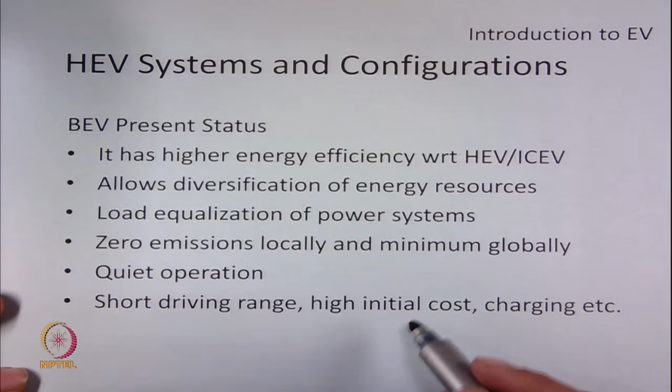The battery cost is high, and if you use a large energy content using a lot of batteries, then it is also costly. Secondly, we require a battery replacement after a cycle life of maybe 5 years, which again adds to the cost of electric vehicles.

Charging, as we have seen, is one of the very important things for a BEV. So the battery needs charging, and that also causes charging time to be available to the customer. Secondly, there is the requirement of charging infrastructure, which is not there at present on a large scale as compared to the filling stations for IC engine based vehicles. So all these limitations are hindering the growth of BEV as a mass scale vehicle.

So what is the solution? Hybridization of resources is one of the key elements which is generally looked into. We have already seen that there is a possibility of using one or more energy resources within a BEV.

We have explored that if you use a fuel cell, which has high specific energy, and an ultracapacitor, which has high specific power, or other things together, it is possible to increase the driving range and even get a performance similar to an IC engine based vehicle. But the limitations we have seen in a battery driven vehicle still remain.

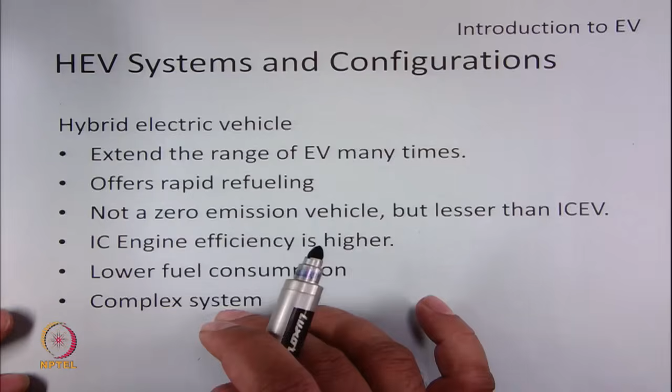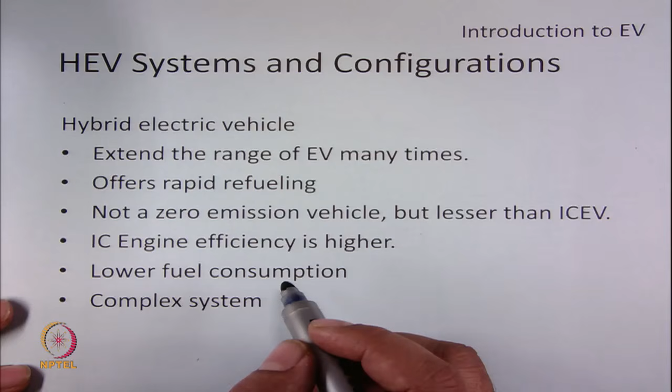So what can a hybrid electric vehicle do? A hybrid electric vehicle is one that utilizes both the IC engine and electric motor within the same vehicle. Since the IC engine based propulsion is attached to the hybrid electric vehicle, range anxiety will not exist anymore. Secondly, since we have filling stations which can readily give petrol or diesel for the vehicle, the fueling infrastructure is also taken care of, and we need limited resources for battery charging.

So it is not a zero emission vehicle, but the emissions are lesser than a full IC engine based vehicle. In addition, we can see that now the IC engine efficiency may be better and it may be taking less fuel for driving the total vehicle.

So the only price we have to pay is now the system will be complex, and it has to be handled properly such that all these benefits can be obtained.

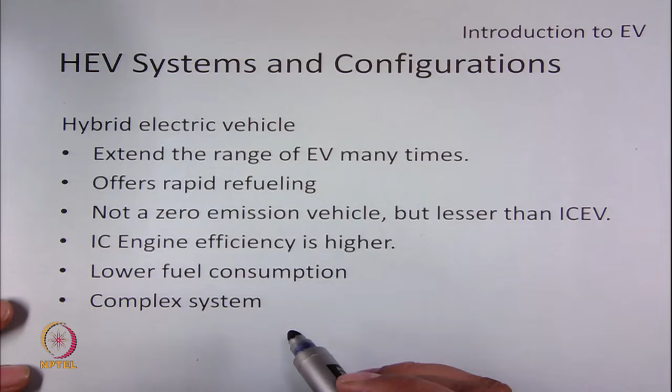In a hybrid electric vehicle, we are combining the efficiencies of an IC engine vehicle and a battery electric vehicle. So let us see the powertrain efficiency of individual IC engine vehicle and electric vehicle.

In an IC engine based vehicle, if we assume an energy input of 100%, the major loss happens as heat energy. So 62% of the energy input to an IC engine is wasted as heat energy. Secondly, a good amount of loss, which is 17%, happens when the IC engine is left idling. This is required because an IC engine is not able to start and stop at very frequent times, so that the efficiency is best.

So we have mechanical losses, known as driveline losses, of 6% in an IC engine based vehicle. In totality, we can see that the effective energy available at the shaft is only 15%.

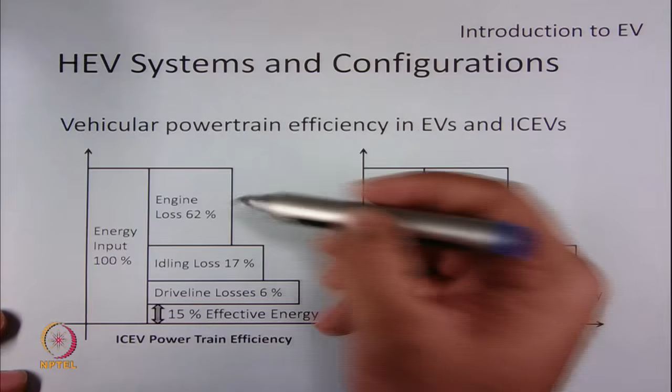So when we combine these two things in a common vehicle, which we are now terming a hybrid electric vehicle, we have to see how the losses of the IC engine based powertrain can be minimized. So there is a scope of improving engine efficiency, because it is not alone now, it has support from the EV motor.

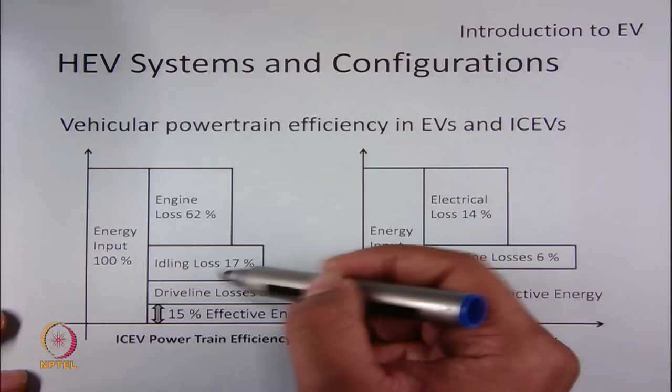Secondly, can we do something for decreasing the loss due to idling operation? So energy efficiency improvement is possible in an IC engine based powertrain by incorporating a feature known as start-stop feature. The engine is no longer needed to keep idling, and it can be stopped whenever supposed to. This feature enables 6% saving in energy.

In a hybrid electric vehicle, there is also a possibility to store the regenerative braking energy. This can add another 6% to the energy savings, and we can say that with these two features, roughly we are saving 12% of the energy.

As we said earlier, the IC engine has a major loss component as heat energy. This is due to the inefficient operation of the IC engine. This can be improved by operating the electric motor such that the IC engine can now operate at its best efficiency. So there is also a possibility to increase another 15 to 20%, and it is possible to get energy saving in the range of 25 to 30%.

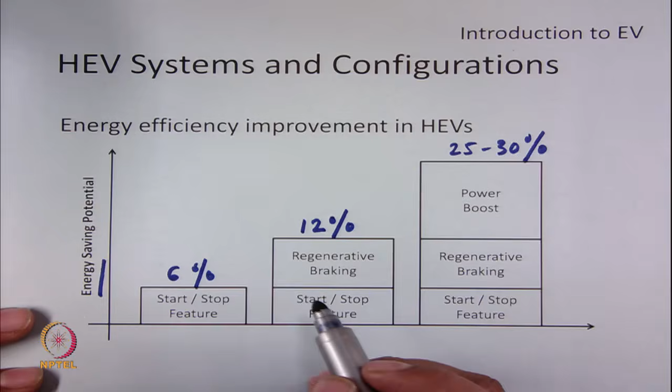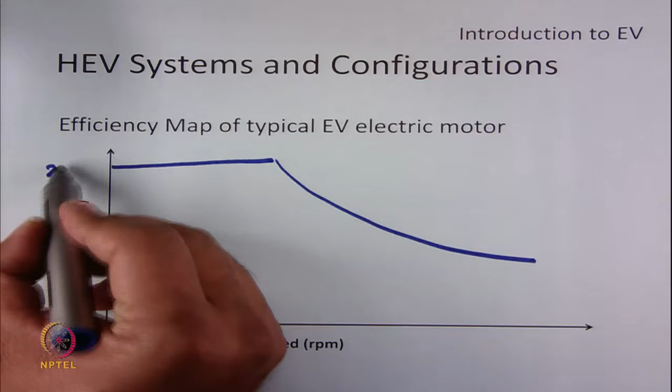So let us see the efficiency map of a typical EV electric motor. If an electrical machine is the sole propulsion device, let's say in a battery electric vehicle, it has to support all the modes of operation. So it has to support the constant torque region, and also the constant power region. Let us assume that 250 Newton meter torque is required, and a speed of around 6000 RPM is required. And let us say we start the constant power region somewhere around 2500 RPM.

So, the efficiency map has to be designed such that the electric motor operates at maximum efficiency in most of the regions. So, this is an important research area, and the typical efficiency map is something like that. We generally get the highest efficiency around this region, let us say 92%. Then we get another region which has, let us say, efficiency of 90%. And another region which has an efficiency of 88%. So, this is an efficiency map.

So, when an electric motor is designed, it has to be taken care that the efficiency is maximum in wide speed and torque ranges.

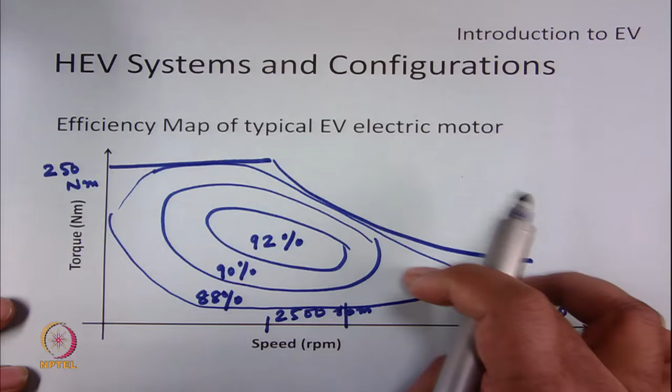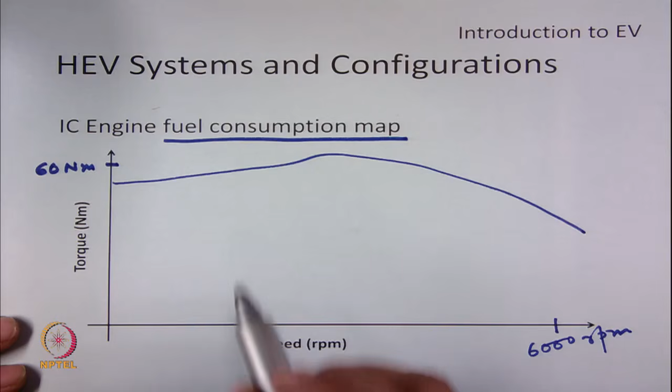Similarly, in an IC engine based vehicle, there is a fuel consumption map, which gives an indication of the fuel economy or fuel consumption. So, let us say the highest is 60 Newton meter torque that can be obtained from an IC engine based vehicle, and we are operating at a maximum speed of again 6000 rpm. So, typically this is the region of operation, and we have pockets similar to the efficiency thing.

And these regions tell the fuel consumption. So, let us say it is 210, 220, 210, this is 240, 270, 350. So, this is basically energy consumption in grams per kilowatt hour.

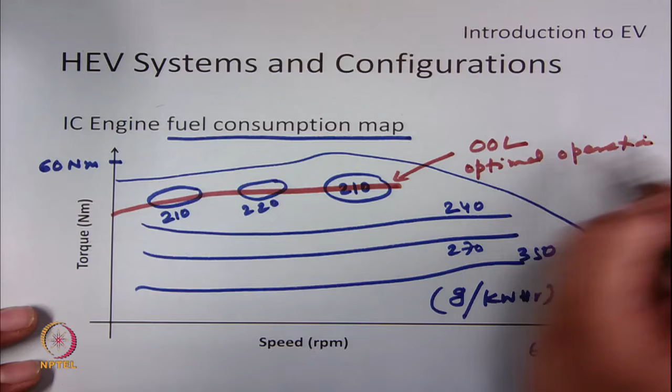So, in a hybrid electric vehicle, the power flow between an IC engine and electric motor is designed such that we obtain maximum fuel economy for the IC engine, minimum system cost, and good driving performance. So, all these things are considered while deciding a control strategy.

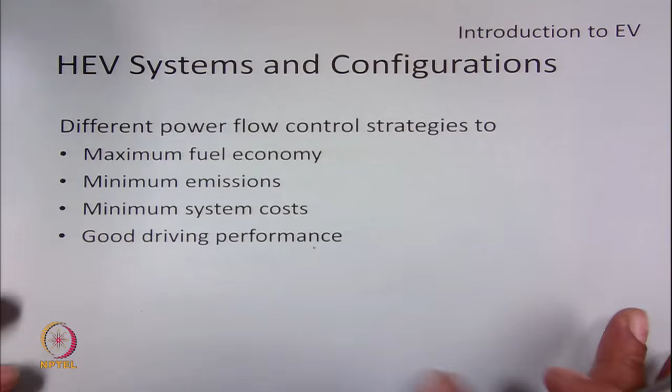So, when we design the drivetrain of a typical HEV, we see that the system always operates such that the fuel economy is maximum and the emissions are also minimum. So, we always operate in the OOL line such that each operating point in the region in a torque speed plane enables that operation.

So, we also should look at minimum engine dynamics. A typical IC engine based system does not give good fuel economy and also leads to higher emissions if the load fluctuations are maximum. So, we should see that the high dynamic operation should not be obtained from the IC engine, rather it should be supported from the electric motor.

Similarly, the engine should not be operated at very low speeds. At very low speeds, again, the emissions are very high and the fuel consumption is also very high. So, when the engine speed is below a certain speed, it is better to stop the engine. The engine needs a minimum turn-on time, rather it is set so that once you start a turn-on operation, the user should not give a turn-off command until the turn-on process is complete. If we do not do that, there is a possibility of heavy emissions and carbon formation in the engine, which is not good for the health of an IC engine.

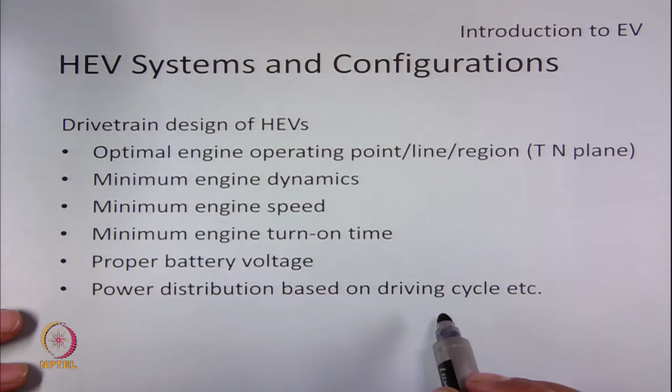So, what are the different types of hybrid electric vehicles? Conventionally, only series hybrid and parallel hybrid types of HEVs were designed, but later more advanced HEVs such as series-parallel operation and complex operation became possible with new age technologies, and these are very popular in high end electric vehicles, especially the hybrid electric vehicle.

As the propulsion device is electrical, we do not need any clutches, which is typically required in an IC engine based vehicle. Therefore, the placement of the IC engine and the generator is flexible and it can be placed anywhere. So this system is very simple to make,

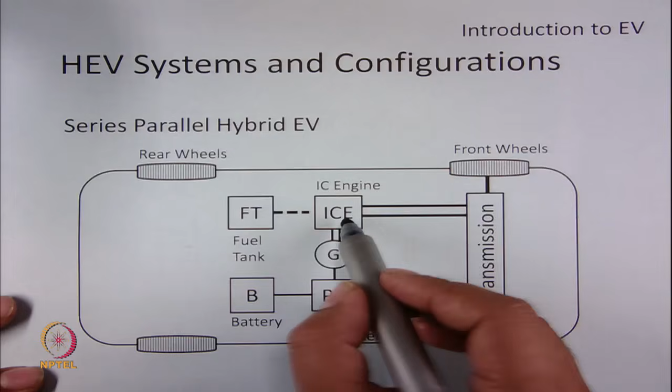To obtain the features of both the series and parallel hybrid in the same HEV, a new configuration known as series parallel HEV was developed. So compared to a series HEV, now a mechanical link is also added between the IC engine and the transmission, and compared to a parallel HEV, an electric generator is connected between IC engine and the power converter.

So this system can obtain all the operation that is possible in a series HEV or a parallel HEV, such that better performance and the fuel economy of IC engine can be obtained.

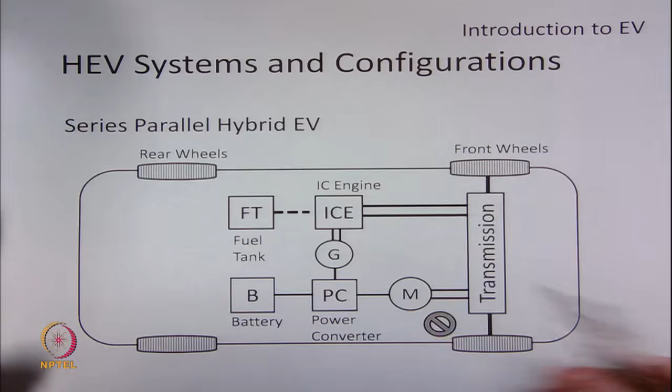Nowadays, complex hybrid EV configurations are becoming popular for high end HEVs, where there are 2 changes compared to series parallel configuration. First is,

now the motor operates both as propulsion system and supporting the IC engine. Secondly, it can also work as a generator for charging the battery. So this machine now has a dual purpose.

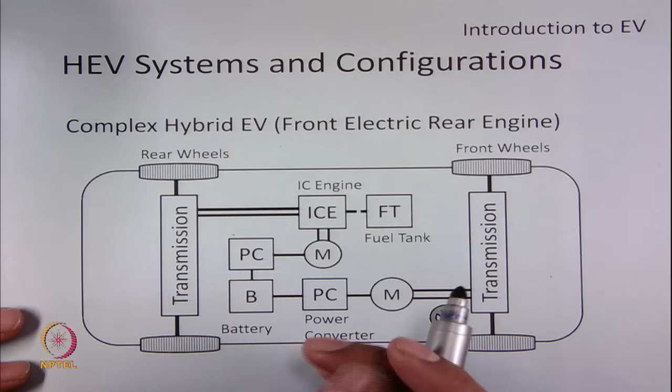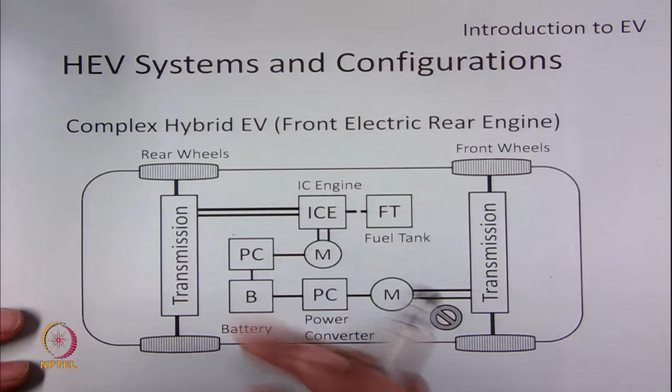So we will discuss the different modes of operation of each of these configurations such as series hybrid, parallel hybrid, series parallel hybrid and complex hybrid in different modes of an electric vehicle such as starting, normal driving, acceleration, deceleration, battery charging, etc. in our next interaction. So thank you for listening.